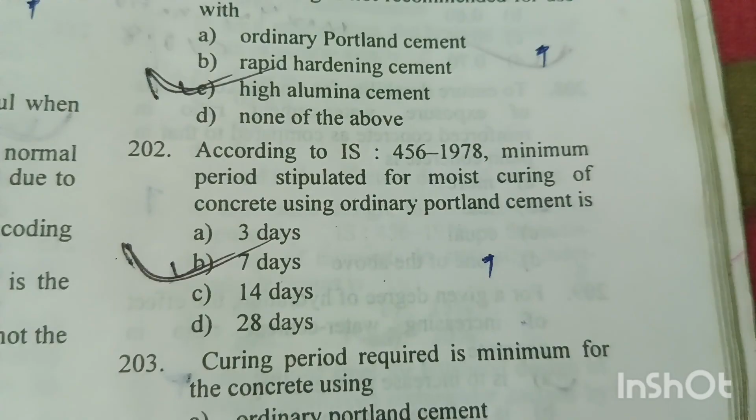Question number 202. According to IS 456 1978, minimum period stipulated for moist curing of concrete using ordinary Portland cement is 7 days. Option B is right answer. Moist curing of concrete is done by spraying water to it or by ponding or canvassing it.

Question number 203. Curing period required is minimum for the concrete using rapid hardening cement. Option C is right answer. Rapid hardening cement requires shorter curing period than ordinary Portland cement, and it is used where early strength and early setting is required.

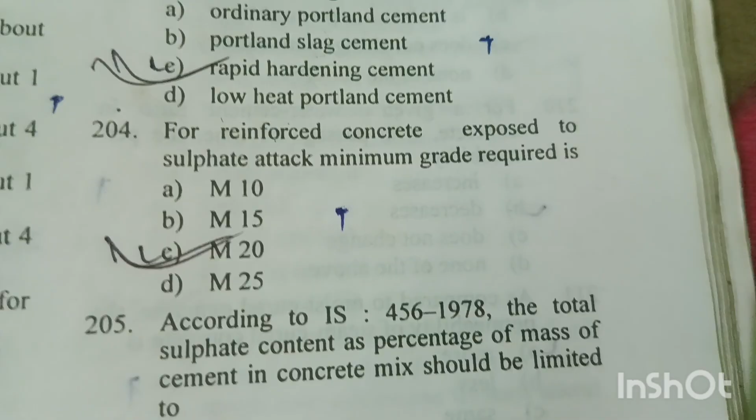Question number 204. For reinforced concrete exposed to sulfate attack, minimum grade required is M20. Option C is right answer. Sulfate attack occurs where concrete is exposed to sulfate containing environments like soil or water. This can lead to cracking and deterioration of concrete. As per IS 456 2000, the value will be M25 for moderate exposure condition and M30 for severe condition, M35 for very severe condition.

Question number 205. According to IS 456 1978, the total sulfate content as percentage of mass of cement in concrete mix should be limited to 4. Option C is right answer.

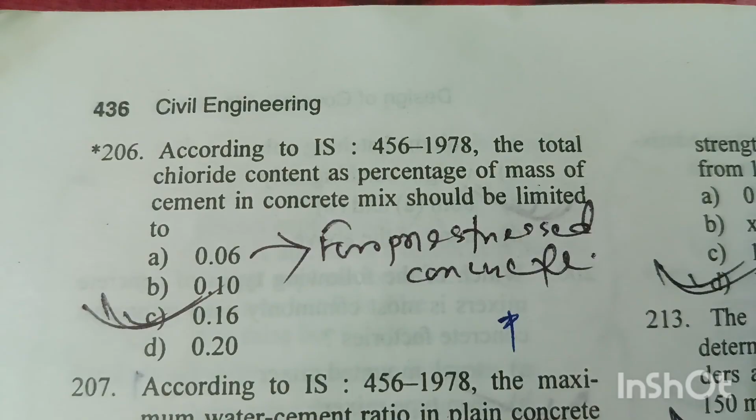Question number 206. According to IS 456 1978, the total chloride content as percentage of mass of cement in concrete mix should be limited to 0.16. Option C is right answer. And 0.06 for pre-stressed concrete.

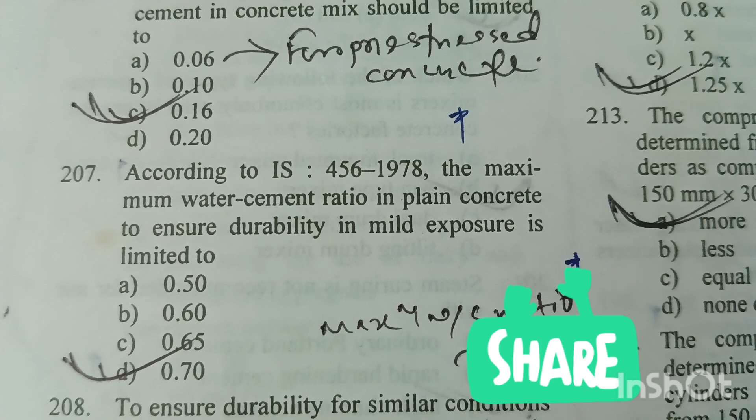Question 207. According to IS 456 1978, the maximum water cement ratio in plain concrete to ensure durability in mild exposure is limited to 0.70. Option D is right answer.

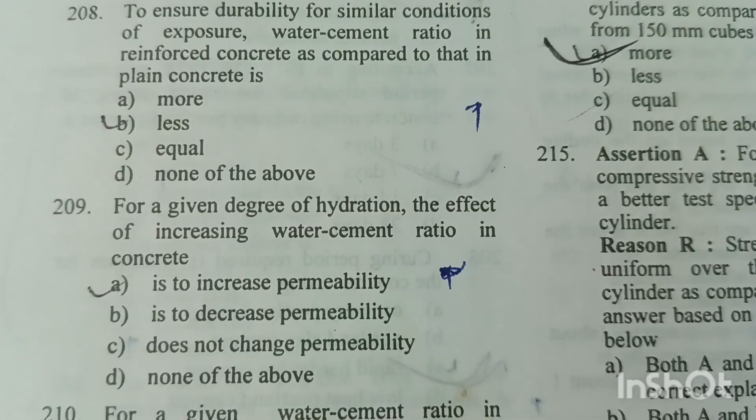Question number 209. For a given degree of hydration, the effect of increasing water cement ratio in concrete is to increase the permeability. Option A is right answer. Generally, a higher water cement ratio results in more pores and permeable concrete.

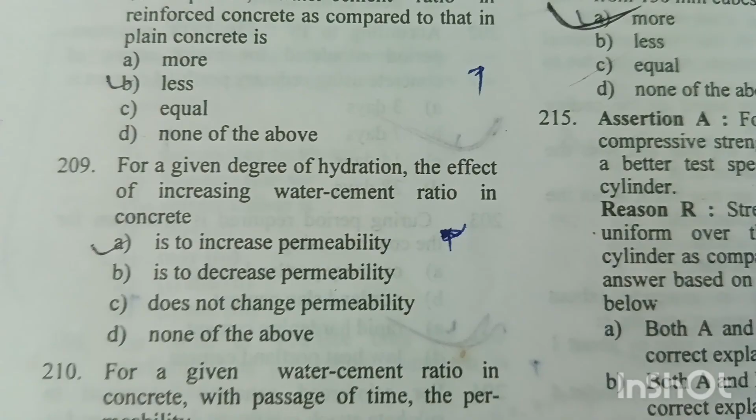Question number 210. For a given water cement ratio in concrete, with passage of time, the permeability decreases. Option B is right answer. With the passage of time, permeability decreases as the ongoing hydration process of cement leads to a denser microstructure and reduced pore size into the concrete, making it less susceptible to fluid passage.

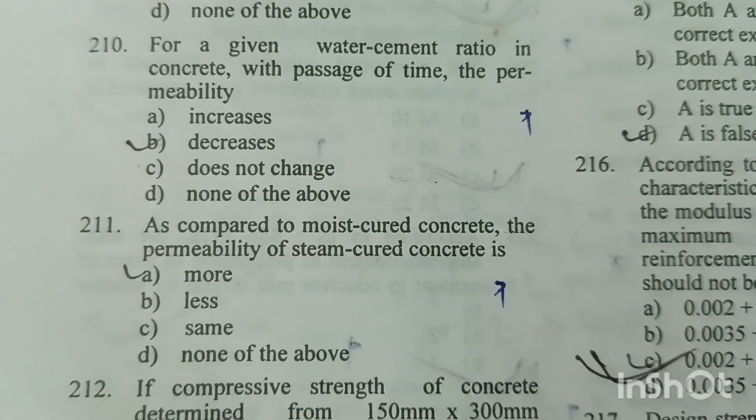Question number 211. As compared to moist cured concrete, the permeability of steam cured concrete is more. Option A is right answer. Steam cured concrete generally exhibits higher permeability, especially on the surface, as compared to moist cured concrete due to heat damage and pore coarsening that can occur during the steam curing process.

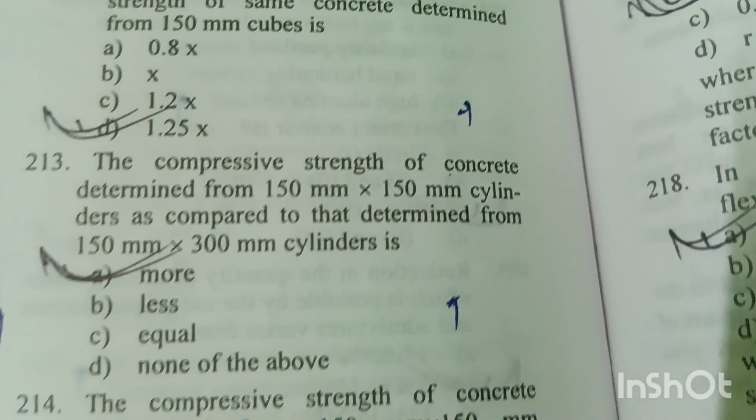Question number 212. If the compressive strength of concrete determined from 150 mm into 300 mm cylinders is X, then the compressive strength of same concrete determined from 150 mm cube is 1.25 into X. Option D is right answer. The value of compressive strength for cube is always 25% more than the cylindrical strength, as cube is a three-dimensional solid object compared to three-dimensional cylinder.

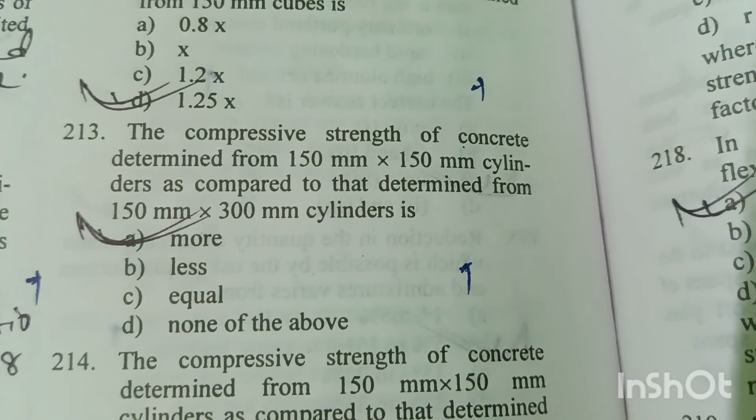Question number 213. The compressive strength of concrete determined from 150 mm into 150 mm cylinder as compared to that determined from 150 mm into 300 mm cylinder is more. Option A is right answer.

Question number 214. The compressive strength of concrete determined from 150 mm into 150 mm cylinders as compared to that determined from 150 mm cube is. The compressive strength of cube will be more according to me, because if we compare, the contact surface area of cube will be more as compared to cylinder under the loading. Option B is right answer.

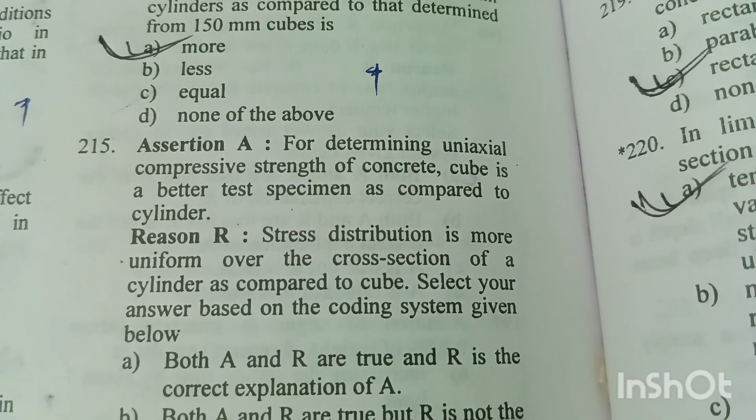Question number 215. Assertion A: For determining uniaxial compressive strength of concrete, cube is a better test specimen as compared to the cylinder. No, better test specimen for determining uniaxial compressive strength of concrete is cylinder, but cube strength can be done triaxially because it has equal dimension in three directions. Reason R: Stress distribution is more uniform over the cross section of a cylinder as compared to the cubes, because of absence of sharp corners in cylinders as compared to cubes. So option D is right answer: A is false but R is true.

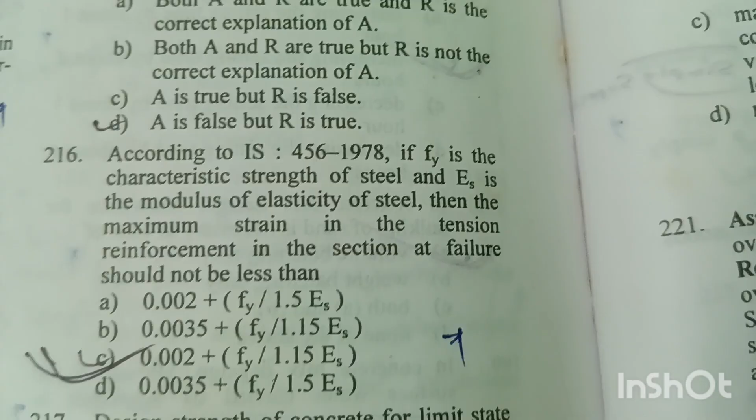Question number 216. According to IS 456 1978, if Fy is the characteristic strength of the steel and Es is the modulus of elasticity of the steel, then the maximum strain in the tension reinforcement in the section at failure should not be less than 0.002 plus Fy divided by 1.15 into Es.

Option C is right answer. Question number 217: Design strength of concrete for limit state of collapse is taken as 0.67 FCK by R, where FCK is the characteristic compressive strength of concrete and R is the partial factor of safety for concrete.

Question number 218: In limit state design of concrete for flexure, the area of stress block is taken as 0.36 FCK into XU. Option A is right answer, where FCK is the characteristic compressive strength of concrete and XU is the depth of the neutral axis.

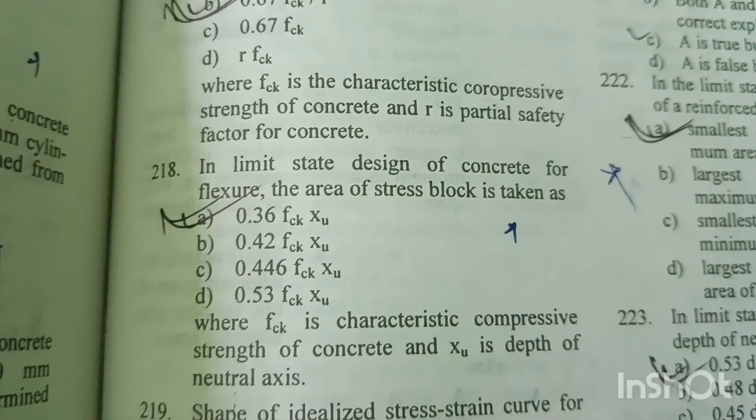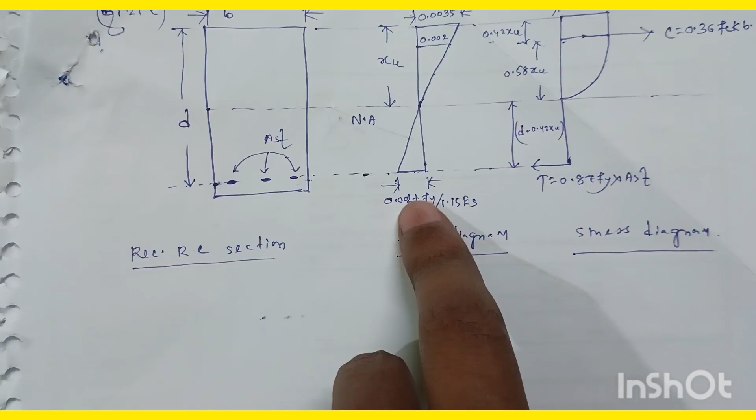The maximum strain value at the extreme top fiber will be 0.0035, and at the level of tensile steel reinforcement will be 0.002 plus Fy divided by 1.15 into Es. This is the stress diagram. We know it is rectangular parabolic above the neutral axis, so the design compressive strength of concrete at the extreme top fiber will be 0.45 into FCK.

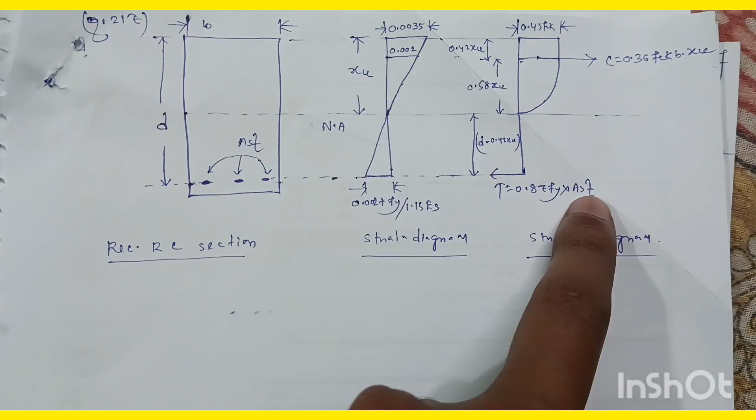Now if we want to calculate the value of tensile force at the level of tensile steel, it will be 0.87 into Fy into AST. Fy is the yield strength of steel and AST is the area of tensile steel. Above the neutral axis, the value of compressive force will be 0.36 into FCK into B into XU. B is the width of the beam, XU is the depth of neutral axis from the top fiber, and FCK is the characteristic compressive strength of concrete.

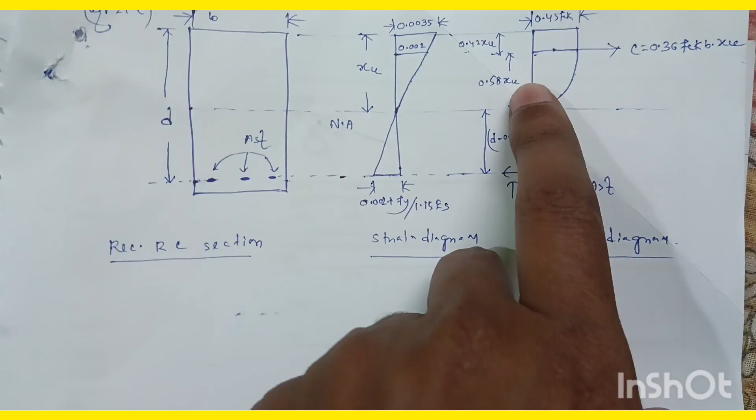Now, if we want to find out the area of stress block, this is the stress block, rectangular and rectangular parabolic, then we have to find out the area of this block and area of this block.

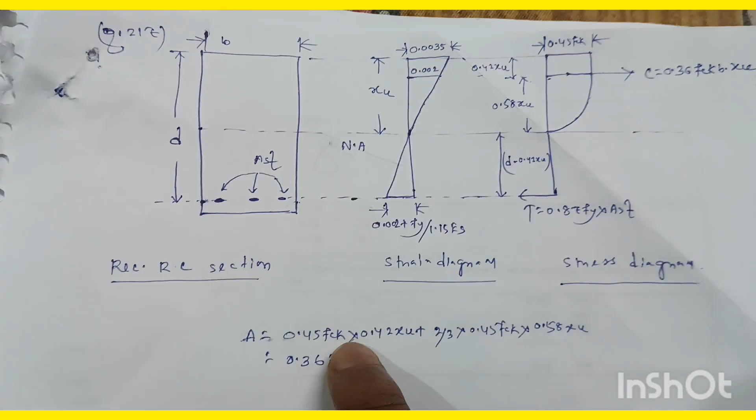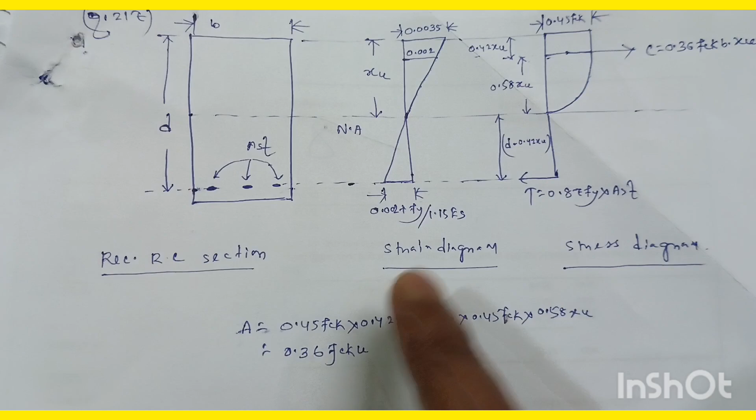Now if we add this area plus this area, the total area of this stress block will be 0.45 FCK into 0.42 XU for the rectangular section, and 2/3 into 0.45 FCK into 0.58 XU for the rectangular parabolic section. So the total area of this stress block will be 0.36 FCK XU.

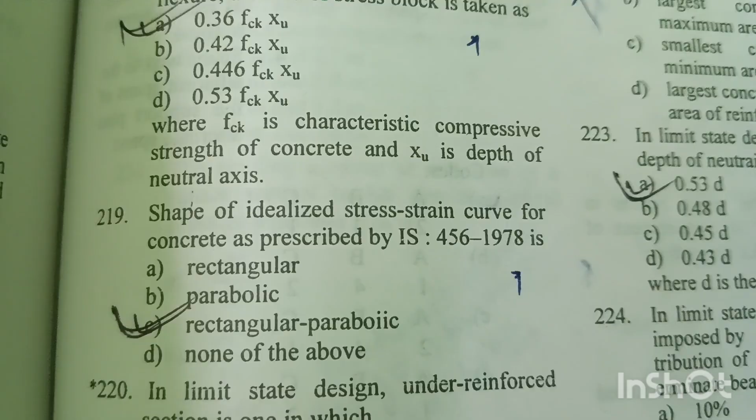Question number 219: Shape of the idealized stress strain curve for concrete as prescribed by IS 456 1978 is rectangular parabolic. Option C is right answer.

Question number 220: In limit state design, under reinforced section is the one in which tensile strain in steel reaches yield value while maximum compressive strain in concrete is less than its ultimate crushing strain. Option A is right answer.

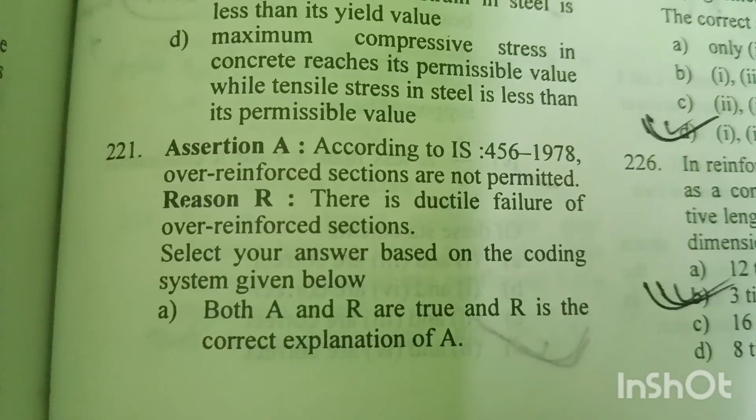Question number 221. Assertion A: According to IS 456 1978, over reinforced sections are not permitted. Reason R: There is ductile failure of the over reinforced section. No, ductile failure will be for under reinforced section where the quantity of steel is less than the balance section.

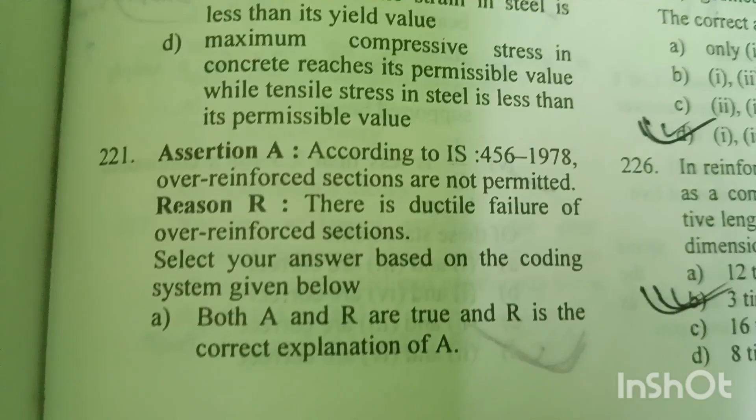But in case of an over reinforced section, the quantity of steel is more as compared to concrete. So the section will fail by concrete, and as concrete is a brittle material, the failure will be brittle type. So option C is right answer: A is true but R is false and not the correct explanation.

Number 222. In limit state method, balanced design of a reinforced concrete beam gives the smallest concrete section and maximum area of reinforcement. Option A is right answer.

In the limit state method, balanced design of a reinforced concrete beam is the one where steel yields and concrete reaches its ultimate strength simultaneously, resulting in the smallest concrete section and maximum reinforcement allowed by the IS code utilized efficiently, leading to a predictable failure.

Question number 223: In limit state design, the limiting value of depth of neutral axis is 0.53 into D. Option A is right answer, where D is the effective depth of the section.

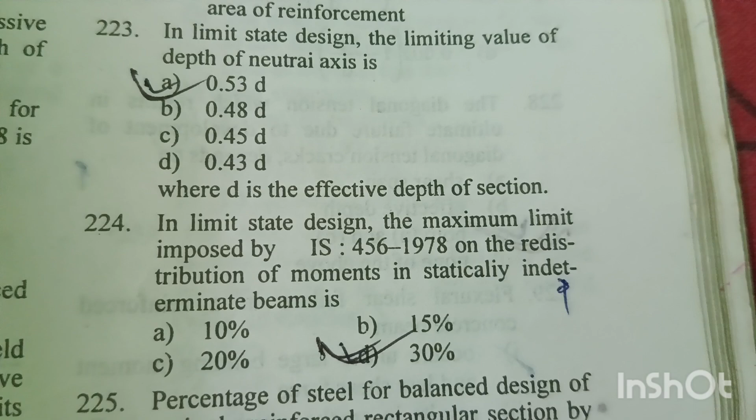Question number 224: In limit state design, the maximum limit imposed by IS 456 1978 on the redistribution of moments in a statically indeterminate beam is 30%. Option D is right answer.

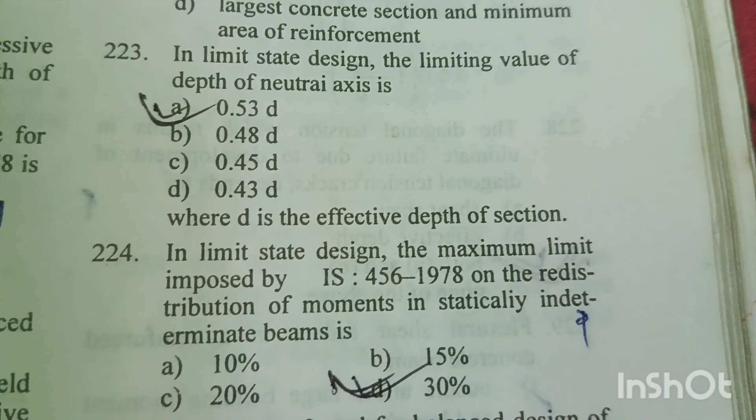In a statically indeterminate structure like a continuous beam, when a beam starts to yield, reaching its plastic capacity at a specified location, the bending moment can shift to the other section of the beam, which allows the designer to create a more efficient and economical structure by utilizing the plastic capacity of the materials.

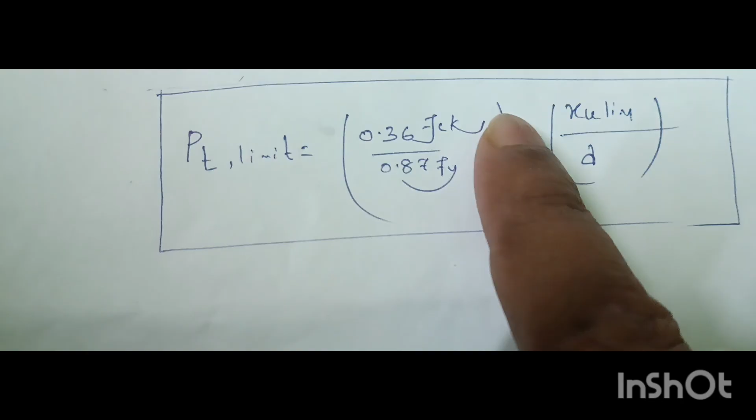Question number 225: Percentage of steel for balanced design of a singly reinforced rectangular section by limit state method depends on... We know the percentage of steel in limiting condition is equal to 0.36 FCK divided by 0.87 FY into XU limit by D. D is the effective depth of the section, XU limit is the depth of neutral axis at limiting conditions, FCK is the characteristic compressive strength of concrete, and FY is the yield strength of the steel.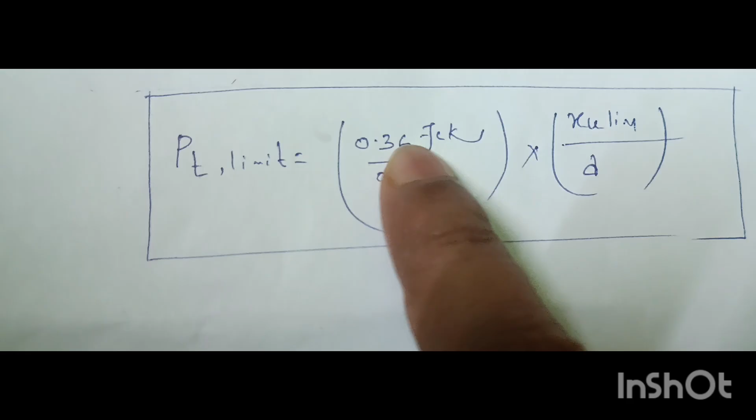The percentage of steel depends on small d, meaning geometry of the section, FCK characteristic compressive strength of concrete, and yield strength of steel. The modulus of elasticity of steel, E, is 200 GPa for most types of steel, so it is constant. Option C is the right answer: 1, 2, and 4.

Question 226. In reinforced concrete, a pedestal is defined as a compression member whose effective length does not exceed its least lateral dimension by 3 times. Option B is the right answer.

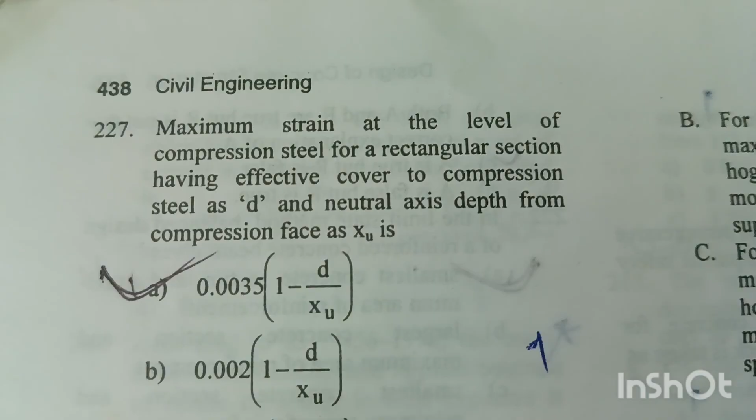Question 227. Maximum strain at the level of compression steel for a rectangular section having effective cover to the compression steel as small d, and neutral axis depth from the compression face as xu, is given in option A: 0.0035 times (1 minus small d by xu).

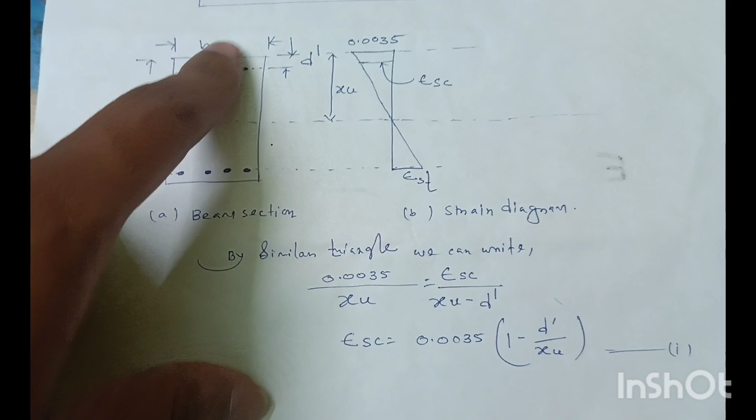This is the beam section with width B and effective depth small d, the distance between the extreme top fiber and the center of the tensile reinforcement. Small d dash is the distance between the extreme top fiber and the center of the compression steel. This is the strain diagram. Suppose the strain at this level is epsilon st, and the strain at the top extreme fiber will be 0.0035.

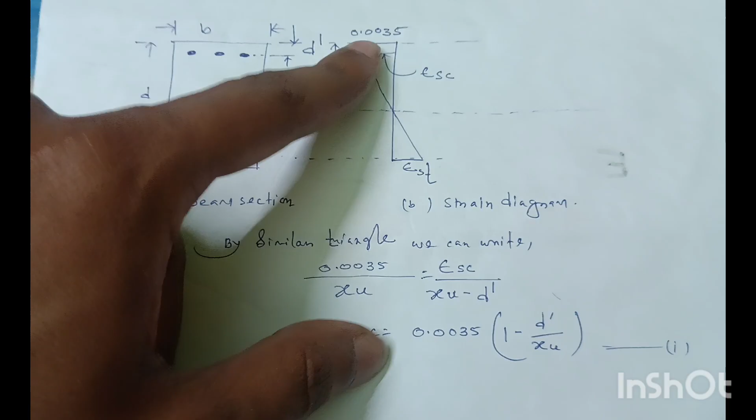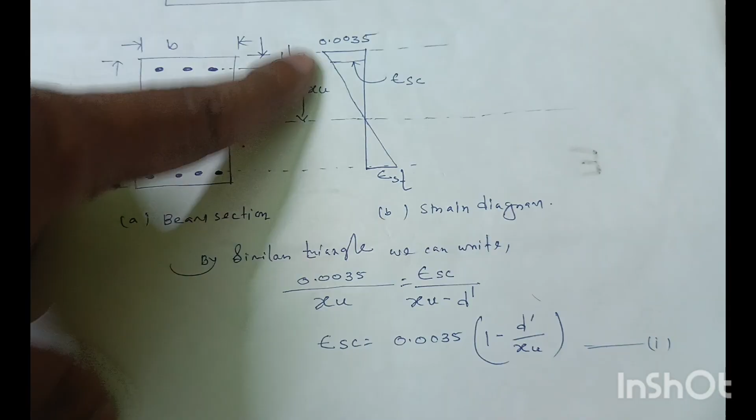Now we have to find the strain at the center of the compression steel, call it epsilon sc, where xu is the depth of neutral axis at limiting condition. By similar triangles, we can write this strain value divided by xu equals epsilon sc divided by (xu minus d dash). Simplifying, epsilon sc equals 0.0035 times (1 minus d dash by xu).

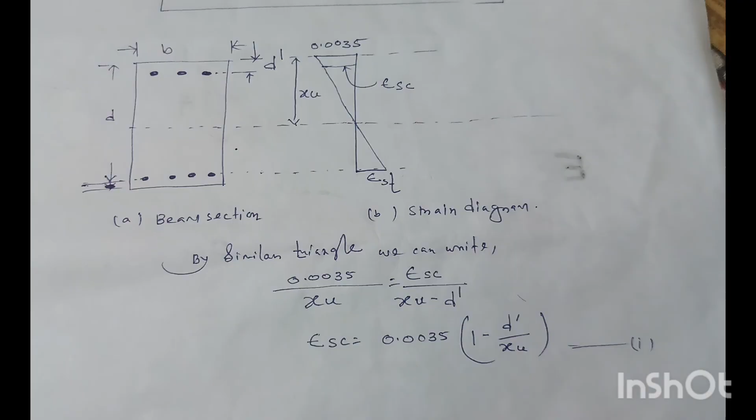Question 228. The diagonal tension which results in ultimate failure due to development of diagonal tension cracks depends on shear span and effective depth. Options A and B are both correct, so option C is the right answer.

The tension caused in the tensile zone of a beam due to shear at or near the supports is called diagonal tension. The ratio of shear span, the distance between the supports, to the effective depth, the distance between the extreme compression fiber and the center of the tensile reinforcement, is a critical factor. A higher ratio increases the risk of diagonal tension. Shear reinforcement is provided in RCC beams to take up the diagonal tension and prevent cracking of the beam.

Question 229. Flexural shear failure in a reinforced concrete beam occurs under large bending moment and lesser shear force, resulting in cracks which are normally at 90 degrees with the horizontal.

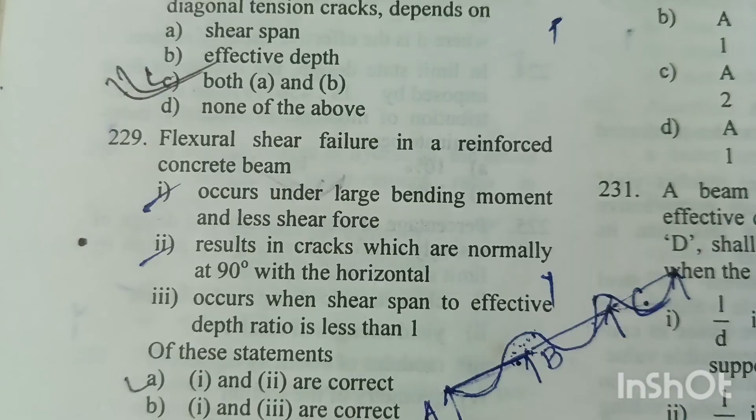Look at the diagram showing the crack pattern for a simply supported beam. For this beam, the diagonal tension crack at the support is at an angle, but at mid span, when the crack is vertical, this is a flexural crack.

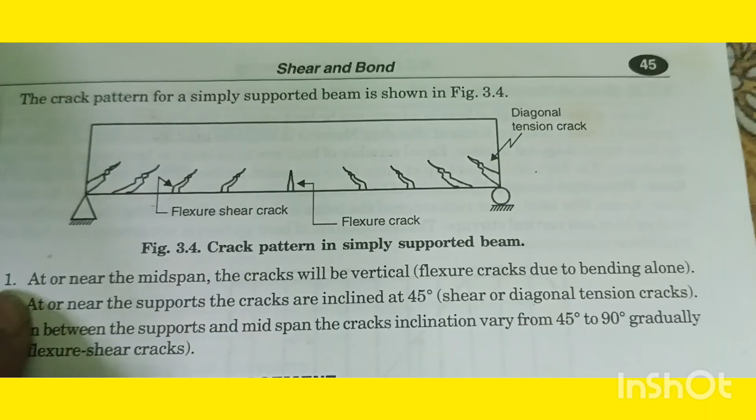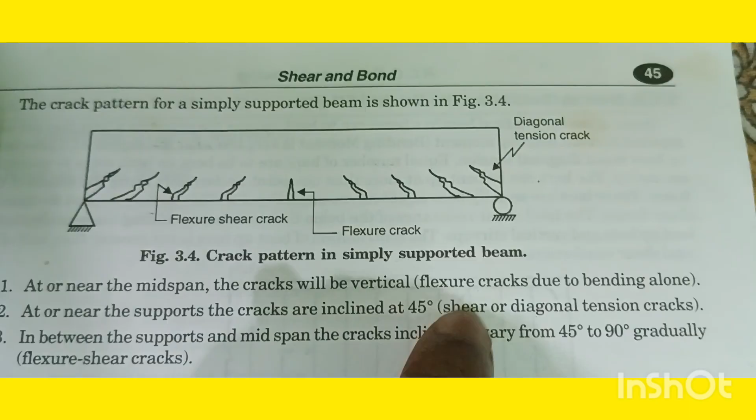At or near the mid span, the cracks will be vertical, which are flexural cracks due to bending alone. Near the supports, the cracks are inclined at 45 degrees, which are shear or diagonal tension cracks. In between the supports and mid span, the crack inclination may vary from 45 degrees to 90 degrees gradually, which is the flexural shear crack. Option A is the right answer.

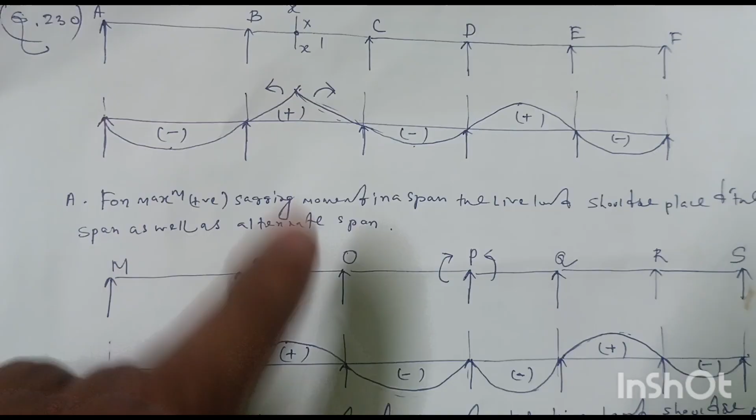Question 230. For a continuous RCC beam, match list 1 with list 2 and select the correct answer using the codes given below. Consider a continuous beam ABCDEF with end spans AB and EF, and intermediate spans BC and CD. If we take an imaginary hinge at X of span BC and apply a pair of positive bending moments adjacent to both sides of the hinge, the deflected shape of the beam will be like this.

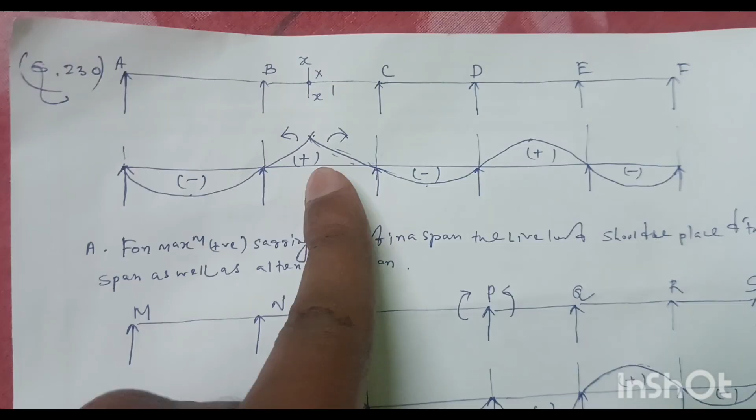From this deflected shape, we can say that to get maximum sagging moment, the live load should be placed on the same span as well as the alternate span. Similarly, we get maximum hogging moment for live load placed at the adjoining spans, which are also the alternate spans.

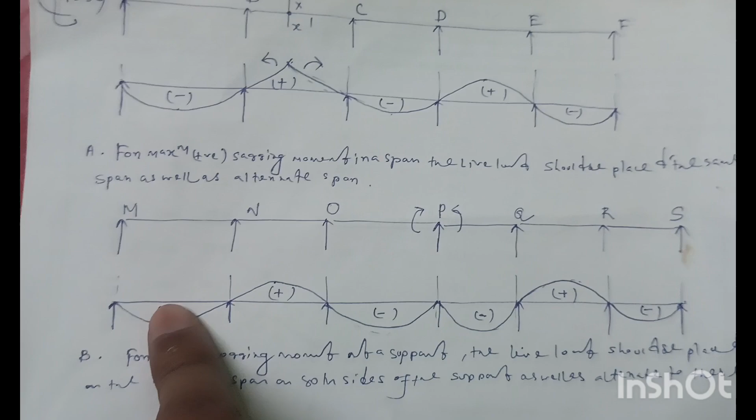If we consider a continuous beam MNOPQRS and take an imaginary hinge at point P with a pair of negative bending moments on both sides of the hinge, the deflected shape will be like this. From the diagram, we can say that for maximum hogging moment at the support, the live load should be placed on the adjacent spans on both sides of the support as well as the alternate span, these two spans being the adjacent spans on both sides of the support.

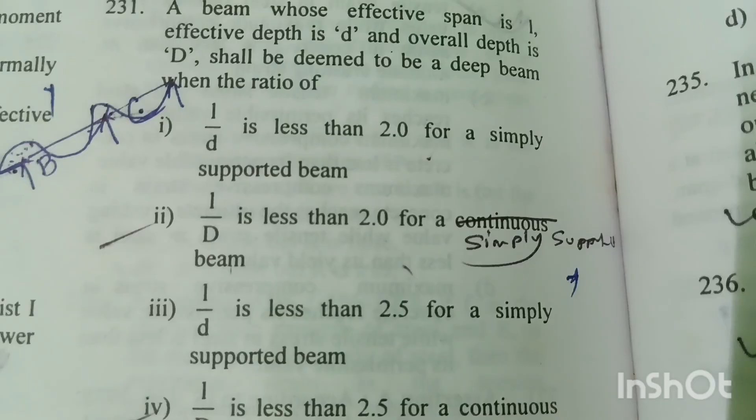Option A is right answer. Question number 231. A beam whose effective span is L, effective depth is small d, and overall depth is capital D shall be deemed to be a deep beam when the ratio of L by D is less than 2 for simply supported beam and L by D is less than 2.5 for continuous beam. 2 and 4 are correct. Option D is right answer.

Question number 232. The effective span of a deep beam is taken as the smaller of A and B: center to center distance between the supports, or 1.15 times the clear span. Option C is right answer, smaller of A and B.

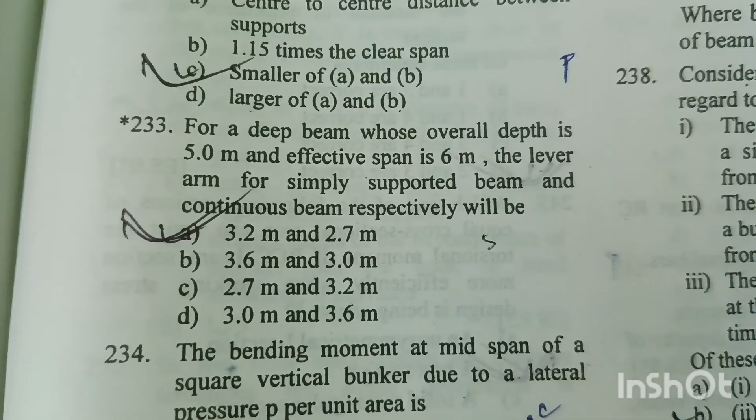Question number 233. For a deep beam whose overall depth is 5 meter and effective span is 6 meter, the lever arm for simply supported beam and continuous beam respectively will be. As per IS 456 2000, in case of simply supported beams, the lever arm value Z is equal to 0.2 into L plus 2D, where L is the effective span of the beam and capital D is the overall depth of the beam, when L by D ratio is greater than 1 but less than 2. But when L by D ratio is less than 1, the lever arm value Z will be 0.6 into L.

And in case of continuous beam, when the L by D ratio is less than 2.5 but greater than 1, the lever arm Z will be equal to 0.2 into L plus 1.5 into D. And if L by D ratio is less than 1, the value of Z will be equal to 0.5 into L. So from the question, for simply supported beam, the value of effective span L equal to 6 and overall depth D equal to 5 meter.

So if we make the ratio L by D, it will be equal to 1.2, which is less than 2. So the lever arm Z will be equal to 0.2 into L plus 2D. So 6 plus 2 into 5, Z will be equal to 3.2 meter. And for continuous beam, if we make L by D ratio, it will be 1.2, which is greater than 1 and less than 2.5. So the lever arm value Z will be equal to 0.2 into L plus 1.5D. So if we put the value, we will get Z equal to 2.7 meter. Option A is right answer.

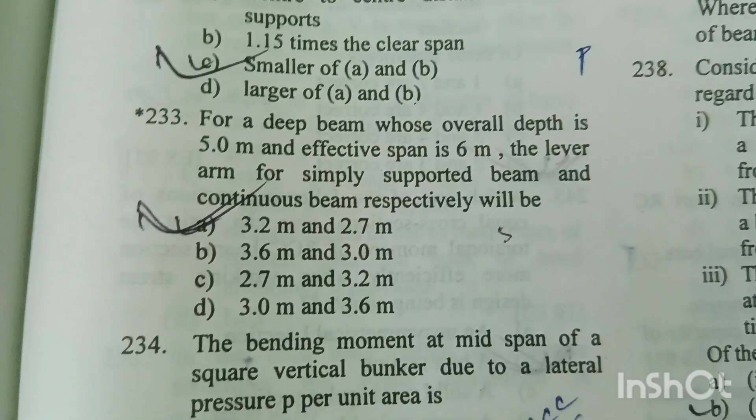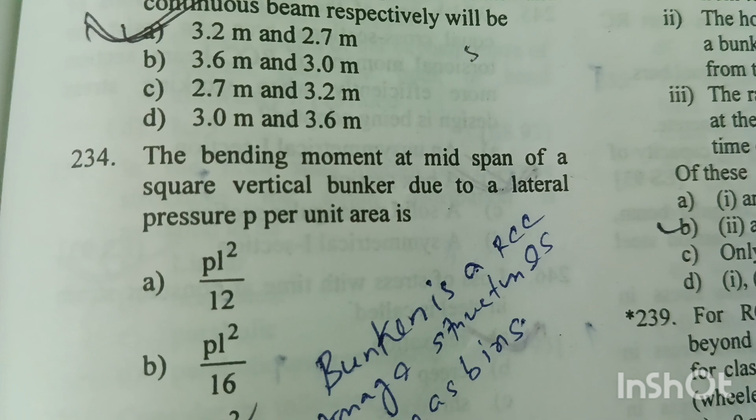Question number 234. The bending moment at the mid span of a square vertical bunker due to a lateral pressure P per unit area is. Bunker is an RCC storage structure used as bins to store coal, cement, grains, etc. The bending moment at the midspan will be PL square by 24, and PL square by 12 at the corner or edge. Option C is right answer.

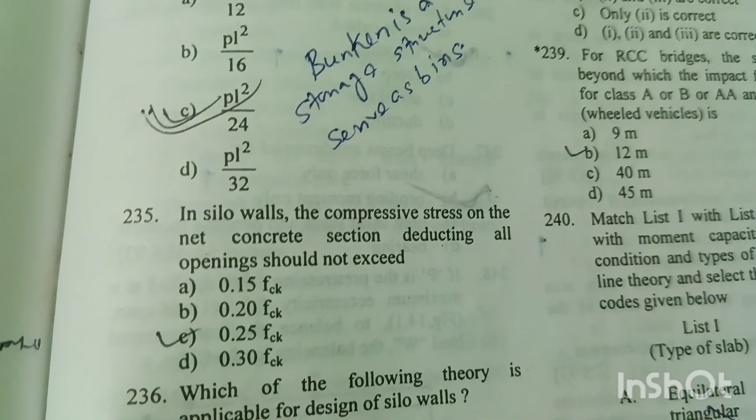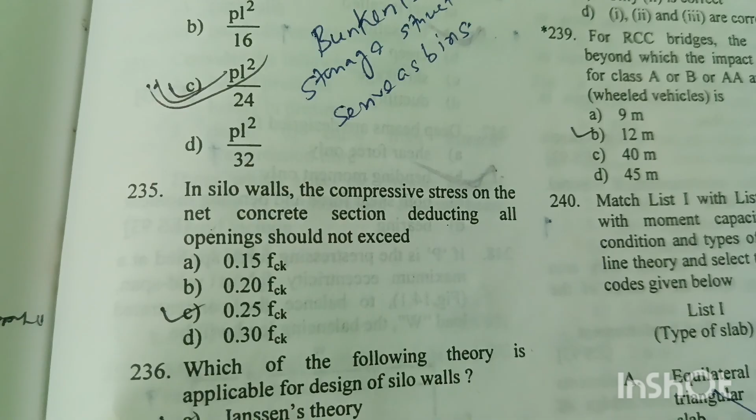Question number 235. In silo walls, the compressive stress on the net concrete section deducting all openings should not exceed. In construction, silo wall means the vertical walls of a tall cylindrical structure used for storing bulk materials like grain, cement, coal, etc., designed to withstand the pressure exerted by the stored materials. The value of compressive stress on net concrete section will be 0.25 into FCK. Option C is right answer.

Question number 236. Which of the following theory is applicable for design of silo walls? Janssen's theory. Option A is right answer.

Question number 237. To ensure lateral stability, the clear distance between the lateral restraints in case of simply supported and continuous beam should not exceed the lesser of 60b or 250 into b square by d. Option A is right answer.

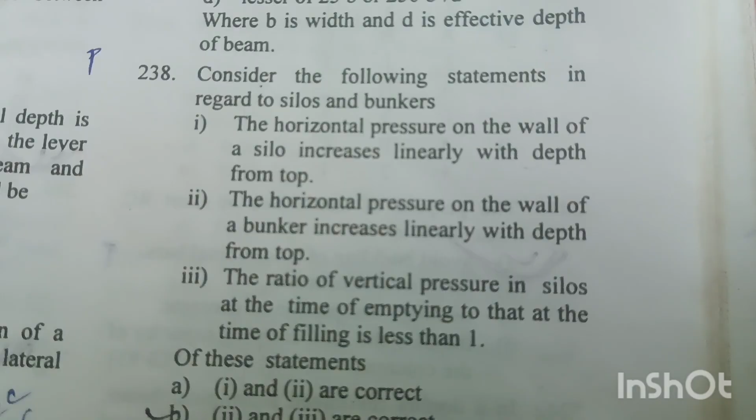Question number 238. Consider the following statements in regard to silo and bunkers. In case of silos, due to their height and effect of wall friction, the horizontal pressure does not increase linearly with depth. So it is an incorrect statement. Statement 2: The horizontal pressure on the wall of a bunker increases linearly with depth from top. In bunkers, since they are wider and shorter, the material behavior is very similar to soil, so Rankine's theory applies and horizontal pressure increases linearly with depth.

So it is a correct statement. Statement 3: The ratio of vertical pressure in silos at the time of emptying to that at the time of filling is less than 1. During emptying, the pressure in a silo decreases compared to when it's filled, due to reduction in material weight and changes in stress distribution. So the ratio of vertical pressure during emptying to filling is less than 1, so it is also a correct statement. Option B is right answer.

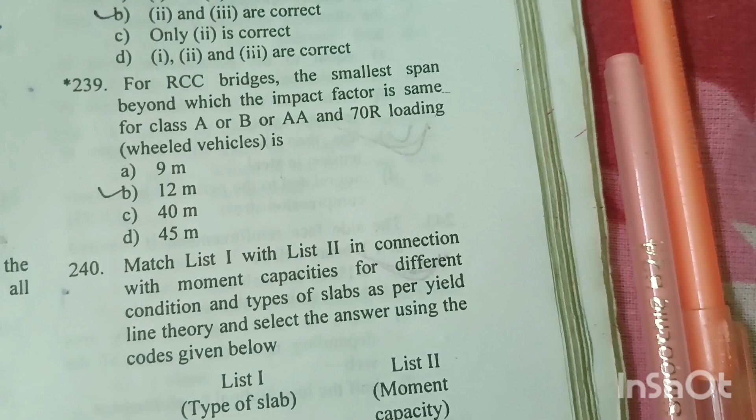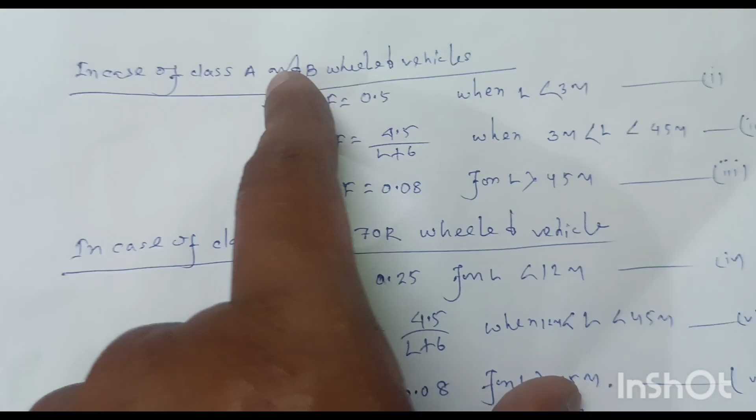Question number 239. For RCC bridges, the smallest span beyond which the impact factor is same for class A or B or AA and 70R loading wheeled vehicle is. So, in case of class A and B wheeled vehicles, the impact factor will be 0.5 when the span is less than 3 meter.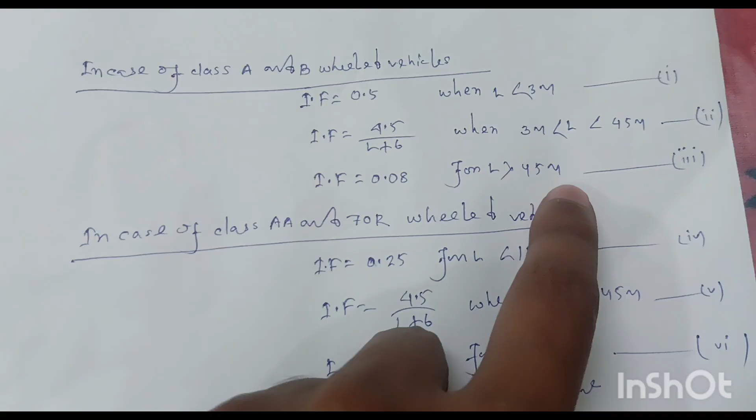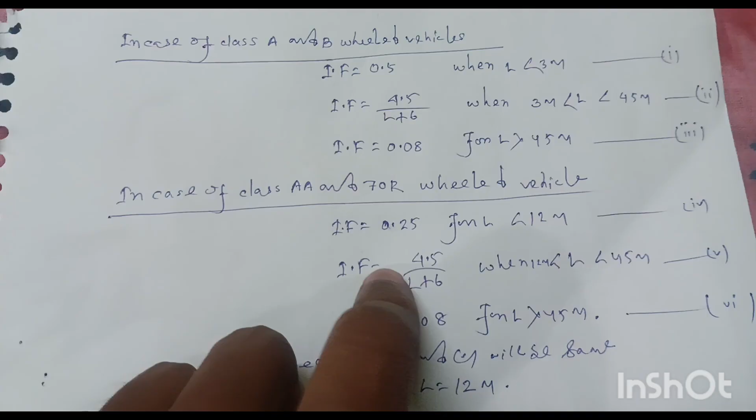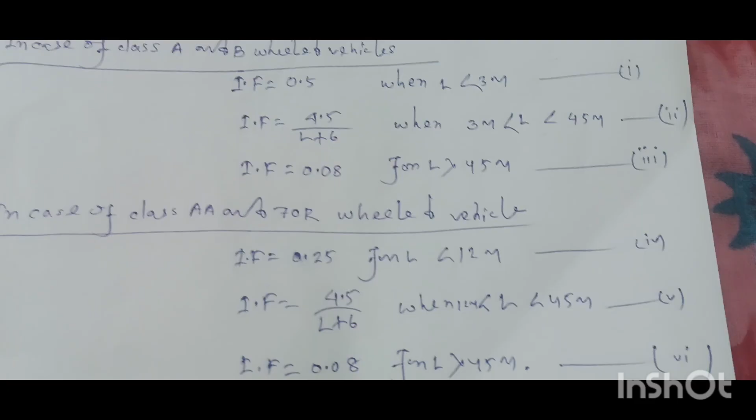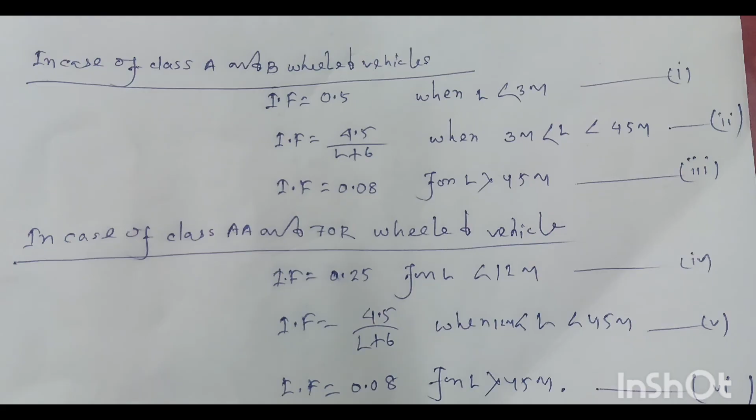Impact factor will be 4.5 divided by L plus 6 when the span of the bridge is less than 45 meter but greater than 3 meter, and the impact factor will be 0.08 for span greater than 45 meter. In case of Class AA and 70R wheeled vehicles, impact factor equals 0.25 for span less than 12 meter, and 4.5 by L plus 6 when span is less than 45 meter but greater than 12 meter, and 0.08 for span greater than 45 meter. So beyond 12 meter span the impact factor value will be same for both classes of wheeled vehicles. Option B is right, as 12 meter.

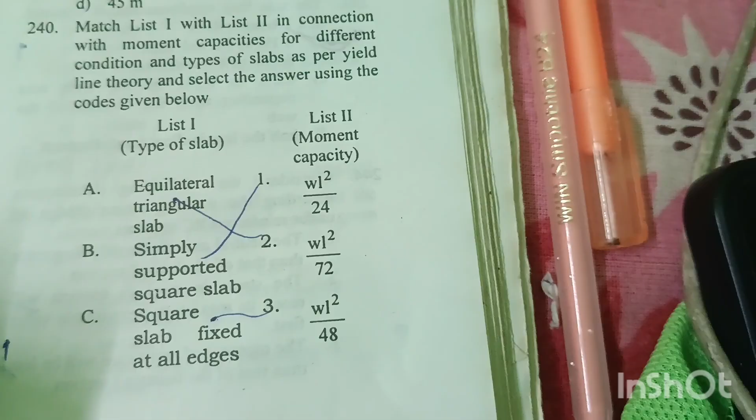Question number 240. Match list 1 with list 2 in connection with moment capacity for different conditions and types of slabs as per yield line theory, and select the answer using the codes given below. List 1 types of slab, list 2 moment capacity. For equilateral triangular slab, the moment capacity is WL square by 72. For simply supported square slab, it is WL square by 24. For square slab fixed at all edges, the moment capacity is WL square by 48.

Question number 241. The purpose of lateral ties in a short RCC column is to avoid buckling of longitudinal bars. Option A is the right answer.

Question number 242. In a doubly reinforced rectangular beam, the allowable stress in compression steel is less than the permissible stress in tension steel. Option C is the right answer.

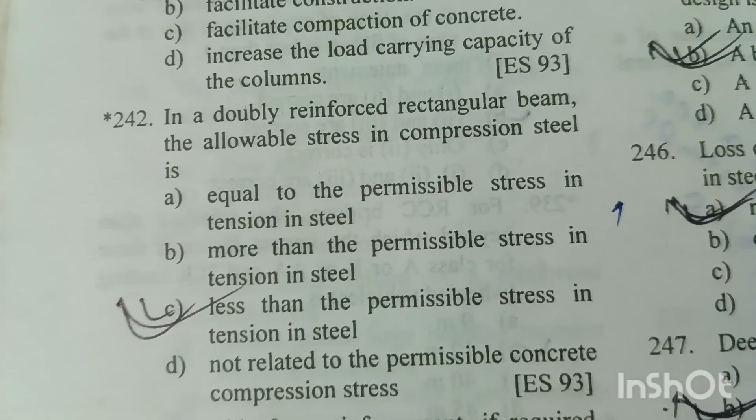Question number 243. The side face reinforcement, if required in a T-beam, will be 0.1% of the web area. Option A is the right answer.

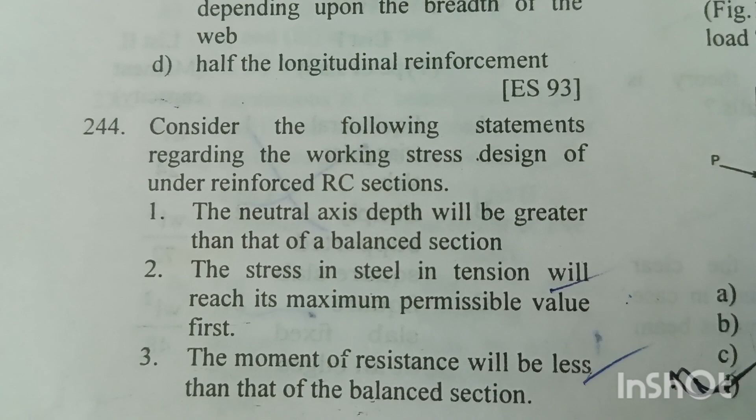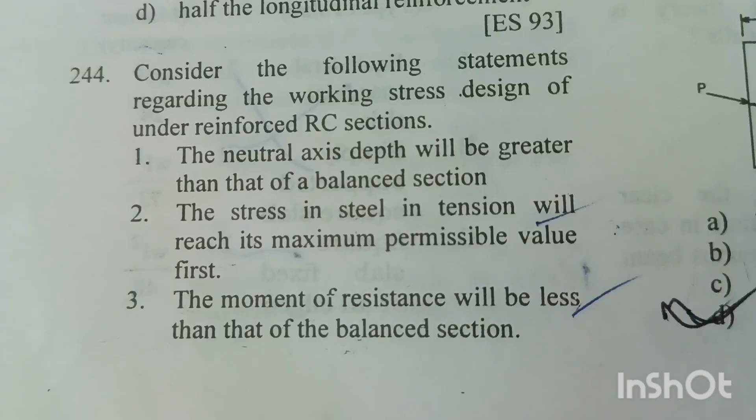Question number 244. Consider the following statements regarding the working stress design of under-reinforced RCC section. The neutral axis depth will be greater than that of a balanced section - no, the section where quantity of steel is less than the balanced section is known as under-reinforced section, so the neutral axis depth will be less than that of a balanced section. The stress in the steel in tension will reach its maximum permissible value first, right? The moment of resistance will be less than that of a balanced section, right? The concrete on the tension side is also to be considered for calculating the moment of resistance - but as per IS code, the concrete on tension side is to be neglected. So option D is the right answer, statements 2 and 3 are correct.

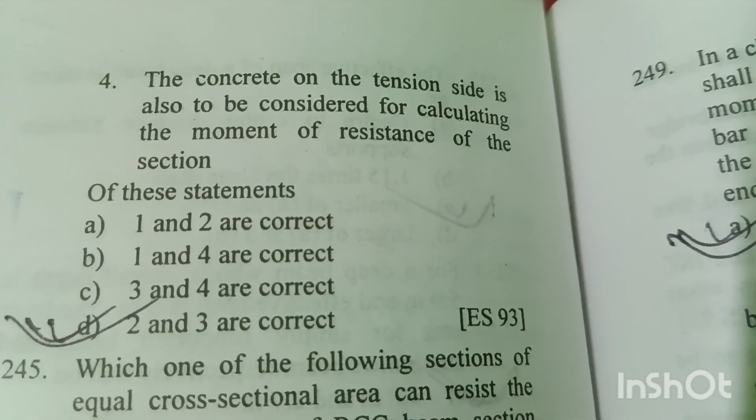Question number 245. Which of the following sections of equal cross sectional area can resist the torsional moment of the RCC beam section more efficiently when the working stress design is being adopted? A box section. Option B is the right answer. Box section has greater torsion resisting capacity than others.

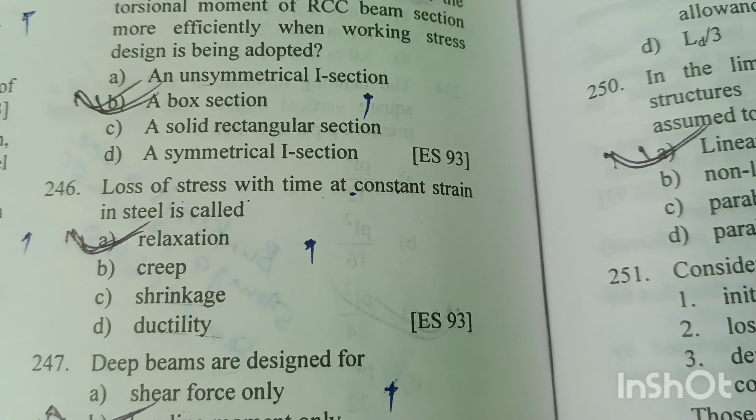Question number 246. Loss of stress with time at a constant strain in steel is called relaxation. Option A is the right answer.

Question number 247. Deep beams are designed for bending moment only. Option B is the right answer.

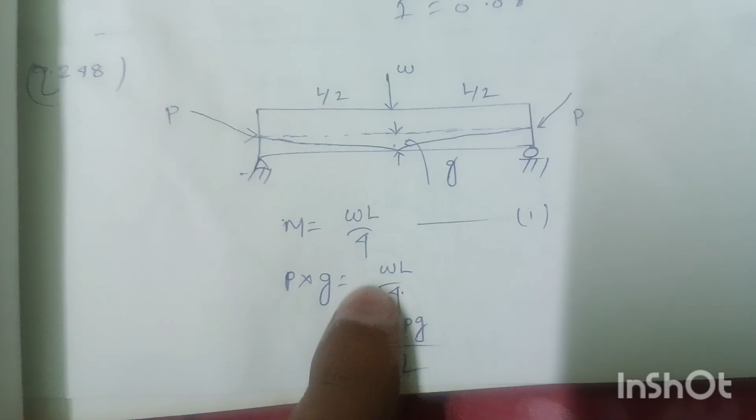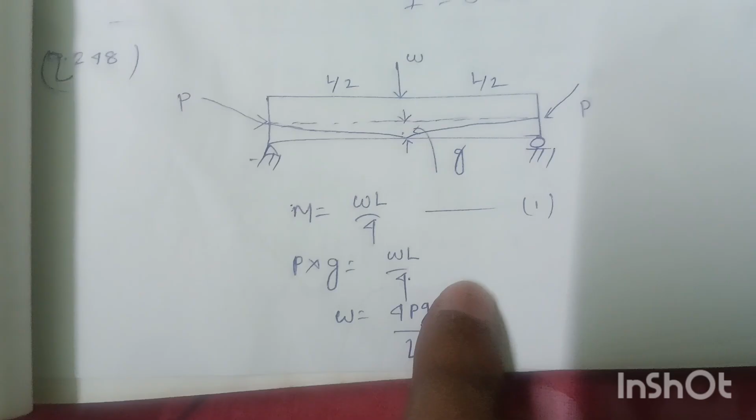Question number 248. If P is the pre-stressing force applied at a maximum eccentricity G at the mid span, figure 14.1, to balance the concentrated load W, the balancing load will be. Consider this beam as a simply supported beam. The load is at the center, so the bending moment under the load will be WL by 4, and the eccentricity of the stressing force P from the center is G. The bending moment under the stressing force, which will counteract the downward load, is equal to P into G. Equating these two bending moments, we get the load is equal to 4PG by L. Option D is the right answer, 4PG by L.

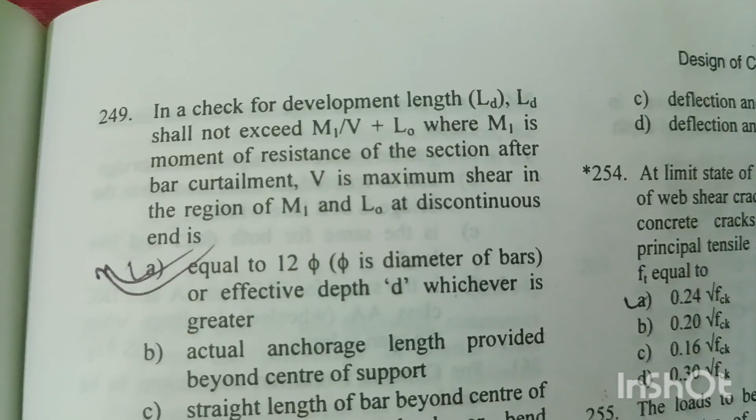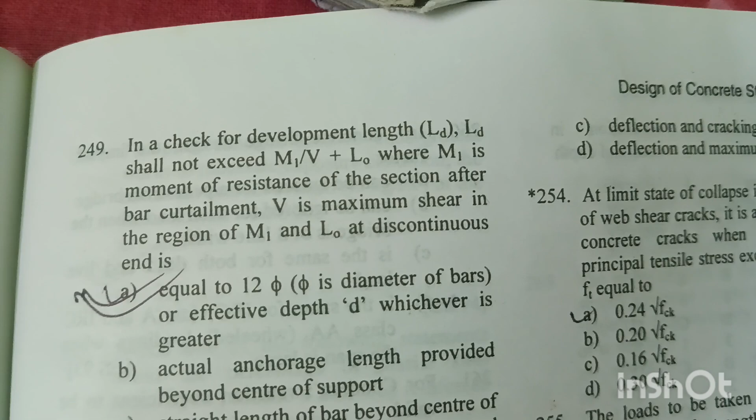Question number 249. In a check for development length, LD shall not exceed M1 by V plus L0, where M1 is the moment of resistance of the section after bar curtailment, V is the maximum shear in the region of M1, and L0 at the discontinuous end is equal to 12 phi, where phi is the diameter of the bars, or effective depth D, whichever is greater. Option A is the right answer. As per IS 456:2000, clause number 26.2.3, for curtailment, reinforcement shall extend beyond the point at which it is no longer required to resist bending for a distance equal to D or 12 phi, whichever is more, except at simple support or end of the cantilever.

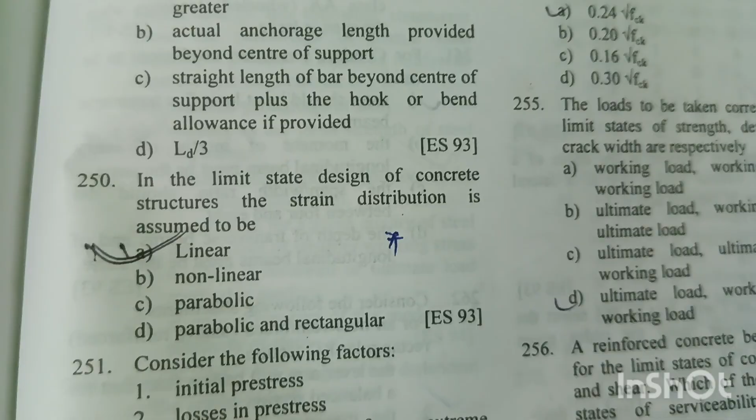Question number 250. In the limit state design of concrete structures, the strain distribution is assumed to be linear. Option A is the right answer.